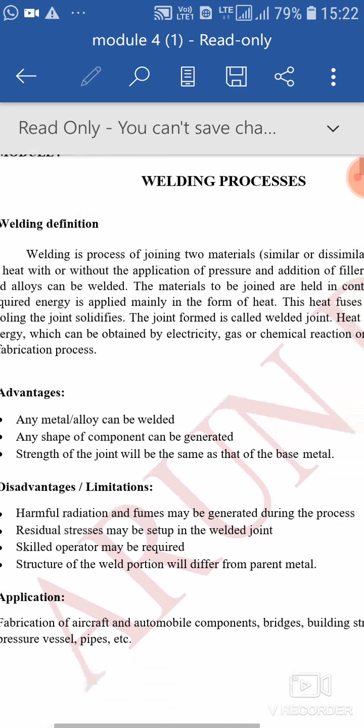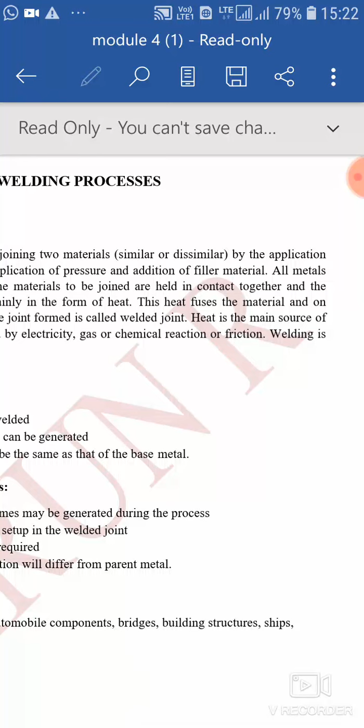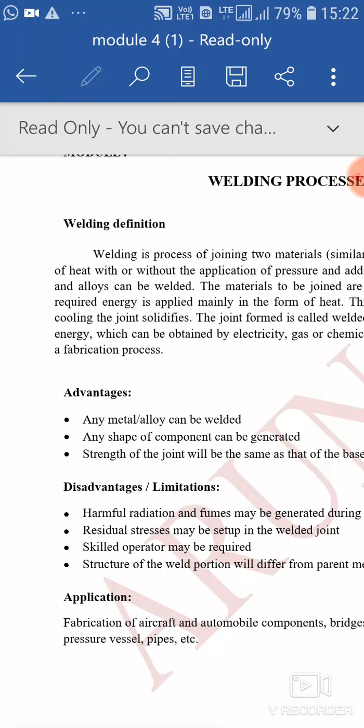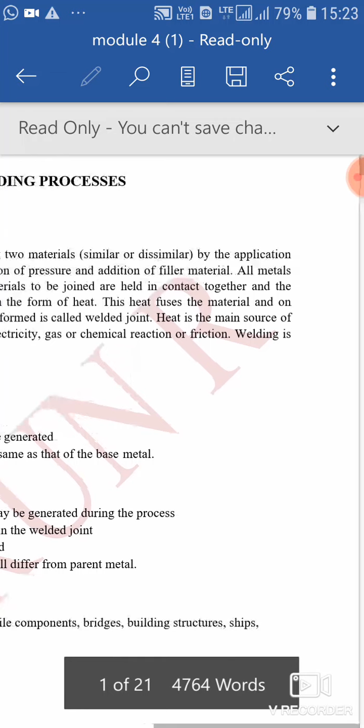The fourth module: welding process. Definition of welding: welding is a process of joining two materials, similar or dissimilar, by the application of heat, with or without the application of pressure, and with or without the addition of filler material. All metals and alloys can be welded. The materials to be joined are held in contact together, and the required energy is applied mainly in the form of heat. The heat fuses the material, and on cooling the joint solidifies. The joint formed is called welded joint. Heat is the main source of energy, which can be obtained by electricity, gas, chemical reaction, or friction.

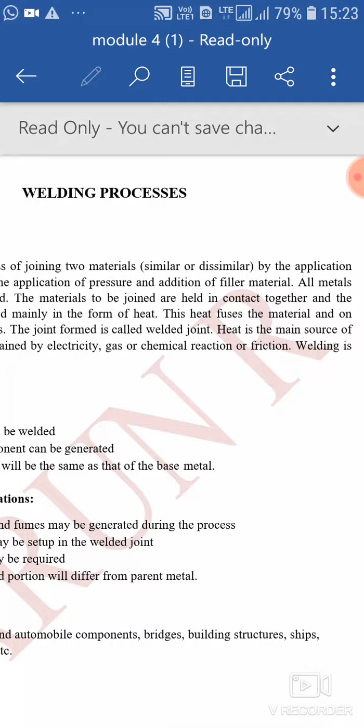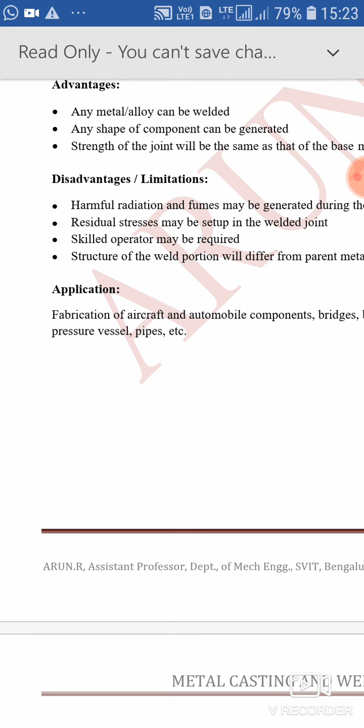Welding is a fabrication process. Advantages of welding: any metal or alloy can be welded or joined. Any shape of the component can be generated. Strength of the joint will be the same as that of the base metal.

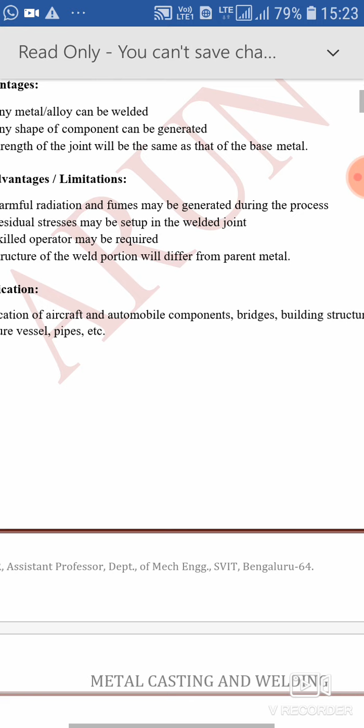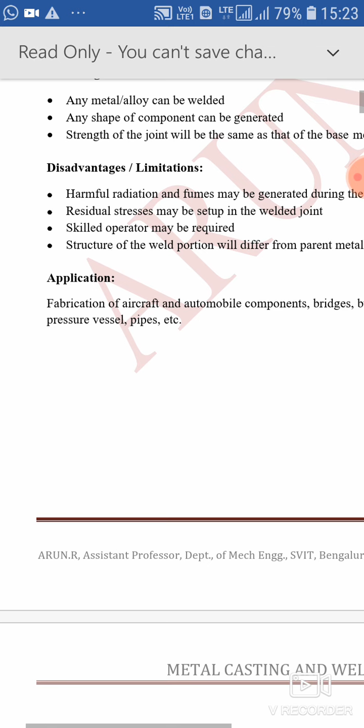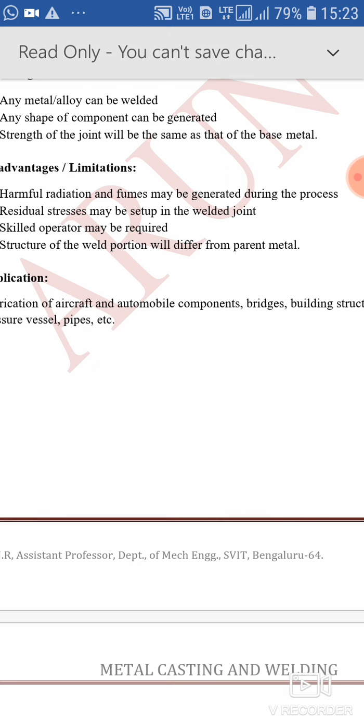Disadvantages and limitations: harmful radiation and fumes may be generated during the process. Residual stresses may be set up in the welded joint. A skilled operator may be required. The structure of the weld portion will differ from the parent metal.

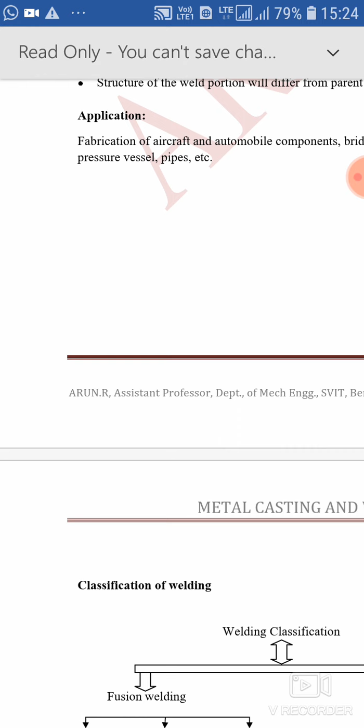Applications of welding: fabrication of aircraft and automobile components, bridges, building structures, ships, pressure vessels, pipes, etc., where welding can be used extensively.

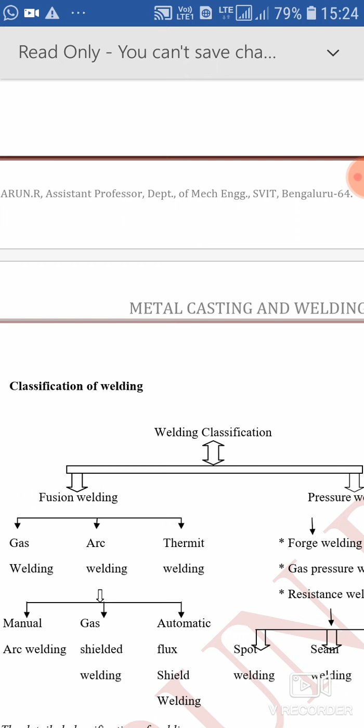Welding is broadly classified into two categories: one is fusion welding, or welding without pressure; the other is pressure welding.

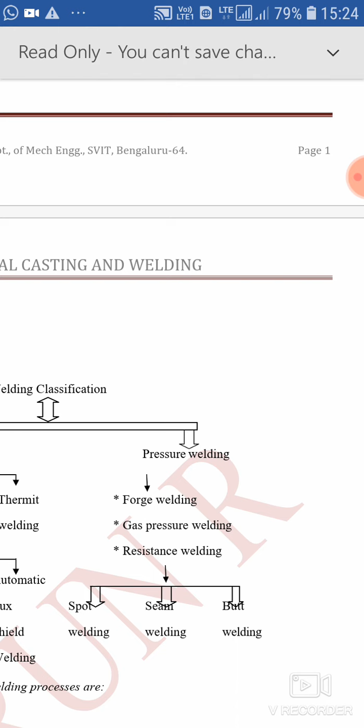In fusion welding: gas welding, arc welding, thermit welding, which are further classified into manual, gas, and automatic. In pressure welding: forge welding, gas pressure welding, resistance welding, spot welding, seam welding, butt welding process.

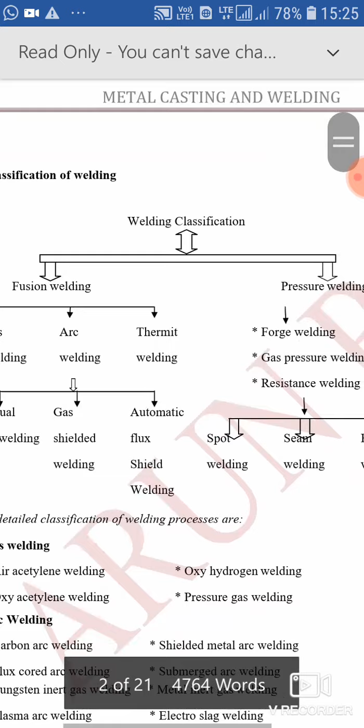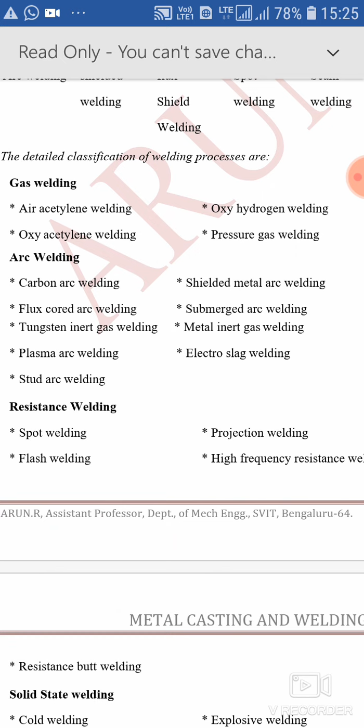Gas welding process: air acetylene welding, oxy-hydrogen welding, oxy-acetylene welding, pressure gas welding.

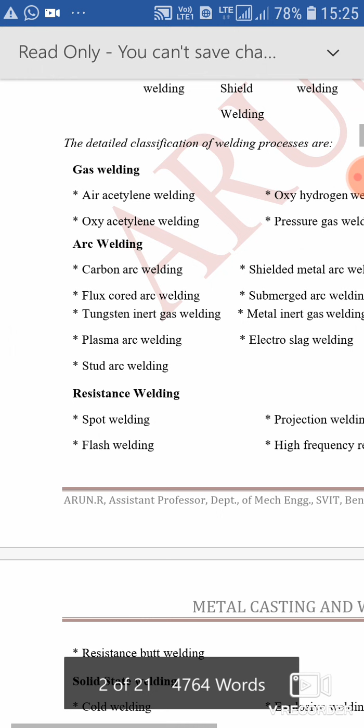Arc welding: carbon arc welding, shielded metal arc welding, flux cored arc welding, submerged arc welding, tungsten inert gas welding, metal inert gas welding, plasma arc welding, electro slag welding, stud arc welding.

Resistance welding: spot welding, flash welding, projection welding, high frequency resistance welding, resistance butt welding.

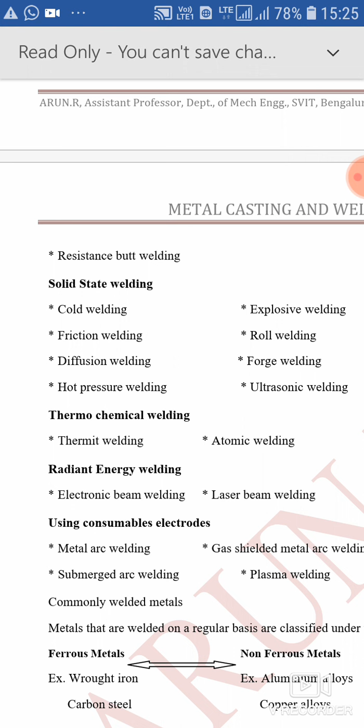Thermochemical welding: thermit welding, atomic welding, radiant energy welding, electron beam welding, laser beam welding, using consumable electrodes: metal arc welding, gas shielded metal arc welding, submerged arc welding.

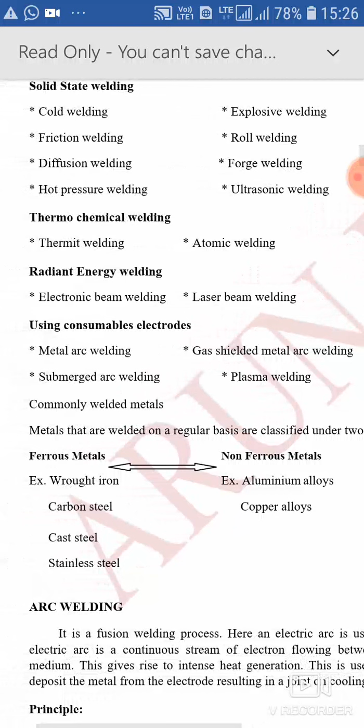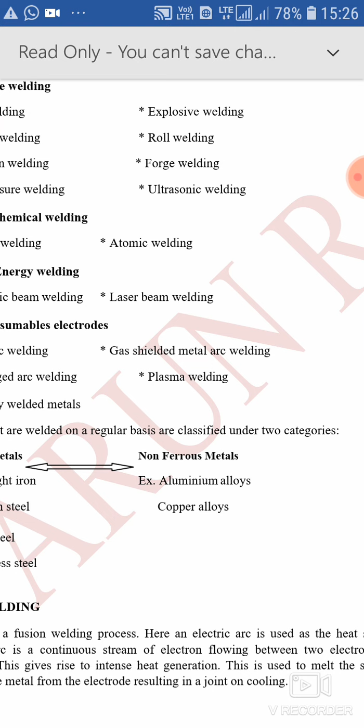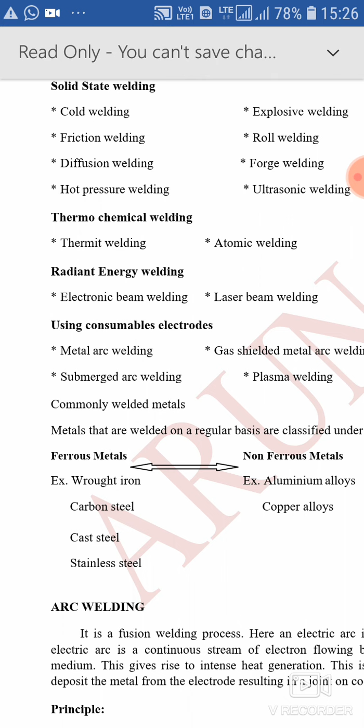Plasma welding. Commonly welded materials: the metals that are welded on a regular basis are classified under two categories: ferrous metals and non-ferrous metals. In the ferrous metal category, examples are wrought iron, carbon steel, cast steel, stainless steel. In non-ferrous metals: aluminum alloys, copper alloys, etc.

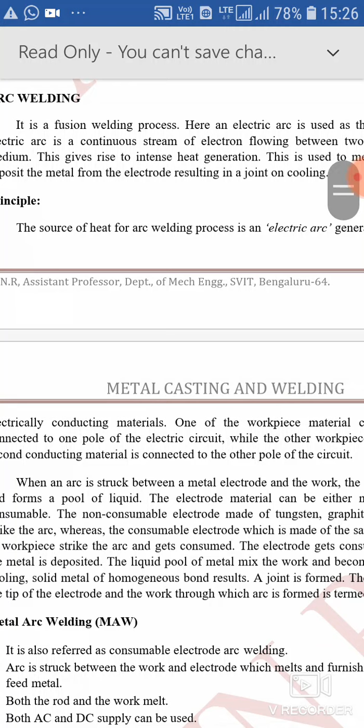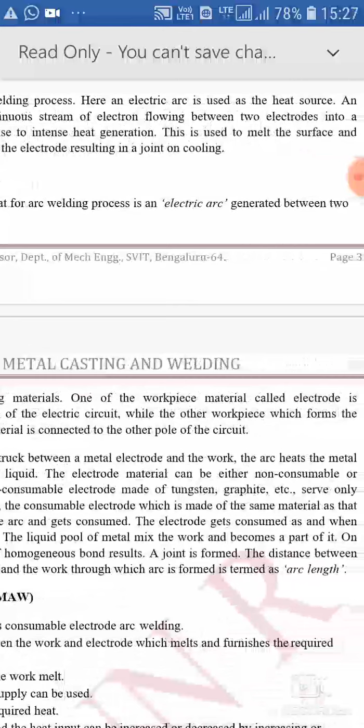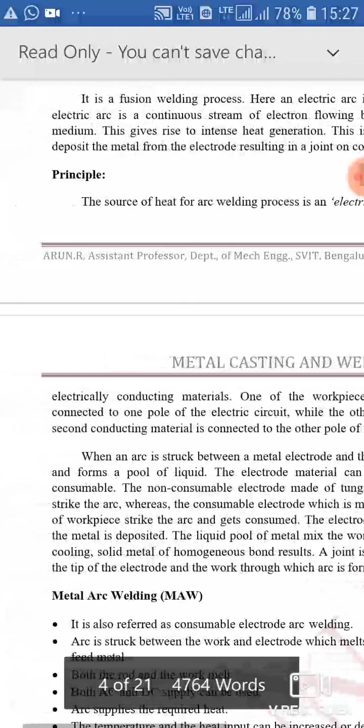Next, arc welding process. It is a fusion welding process. Here, an arc is used as the heat source. An electric arc is a continuous stream of electrons flowing between two electrodes into a medium. This gives rise to intense heat generation, which is used to melt the surface and deposit metal from the electrode, resulting in a joint on cooling.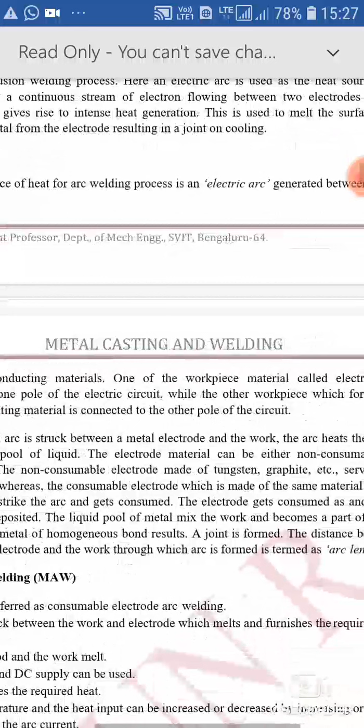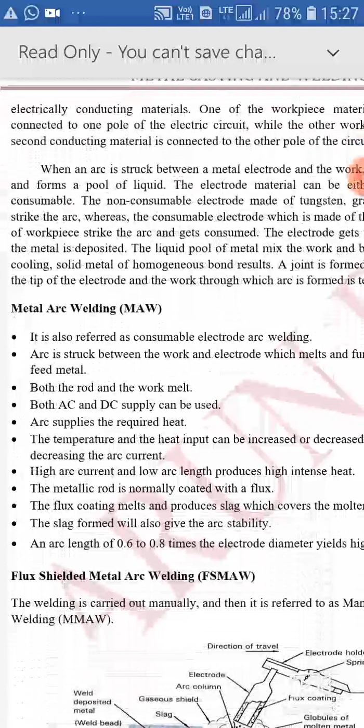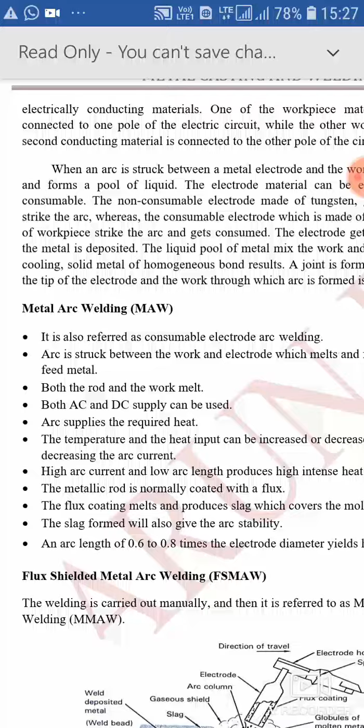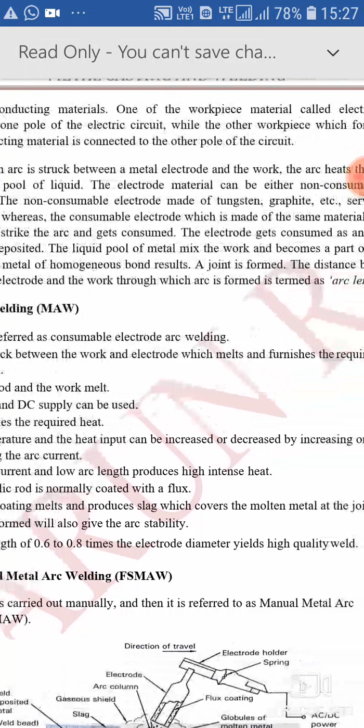Principle: the source of heat for the arc welding process is an electric arc generated between two electrically conductive materials. One of the workpiece materials, called the electrode, is connected to one pole of the electric circuit, while the other workpiece, which forms the second conducting material, is connected to the other pole of the circuit. When an arc is struck between a metal electrode and the work, the arc heats the metal and forms a pool of liquid molten metal.

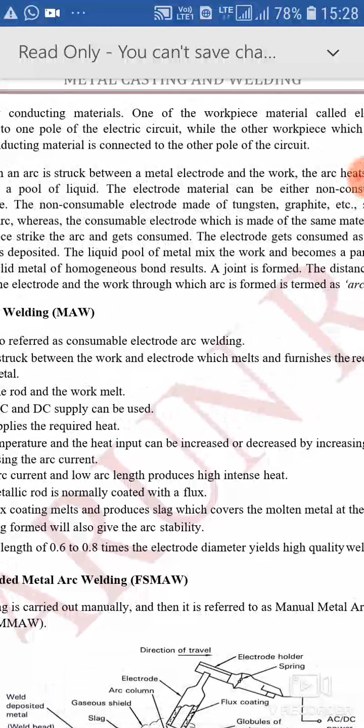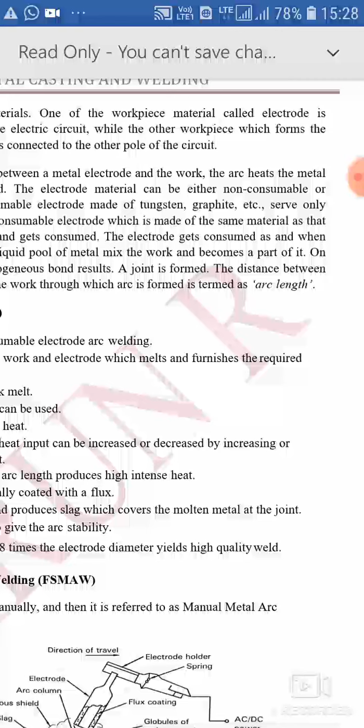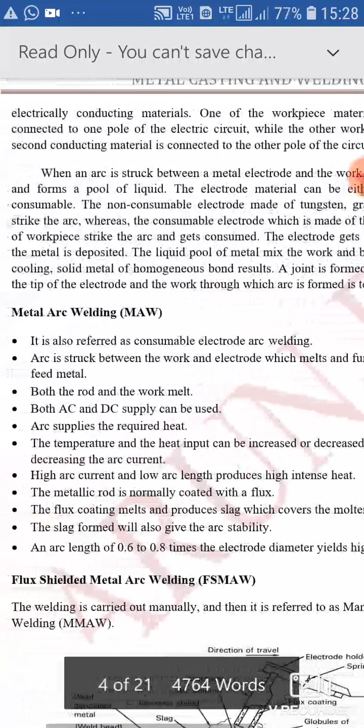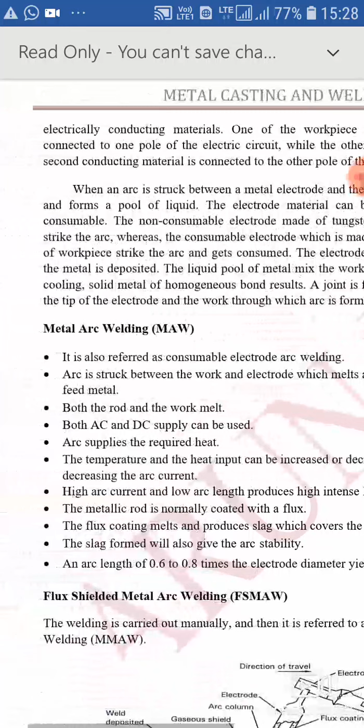The electrode material can be either non-consumable or consumable. The non-consumable electrode, made of tungsten, graphite, etc., serves only to strike the arc, whereas the consumable electrode, made of the same material as the base metal or workpiece, strikes the arc and gets consumed. The electrode gets consumed as the metal is deposited, acting as a filler metal.

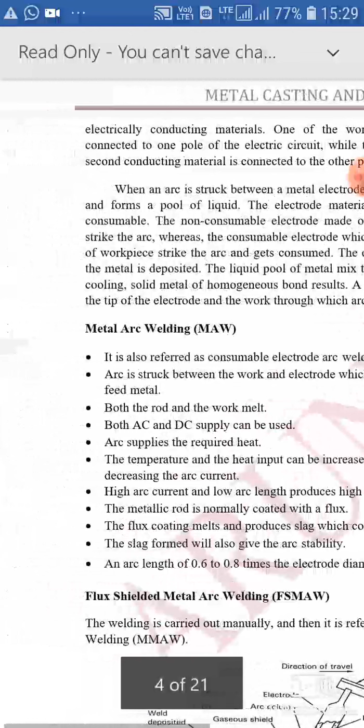The liquid pool of metal mixes with the work and becomes a part of it. On cooling, a solid metal of homogeneous bond results, and a joint is formed. The distance between the tip of the electrode and the work, through which the arc is formed, is termed as arc length.

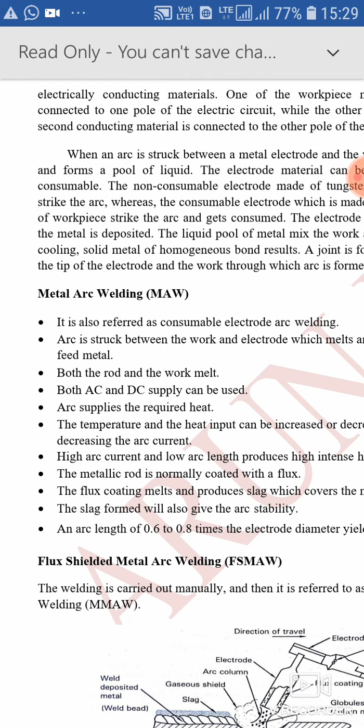Metal arc welding is also referred to as consumable electrode arc welding. An arc is struck between the work and electrode, which melts and furnishes the required feed metal. Both the rod and the work melt.

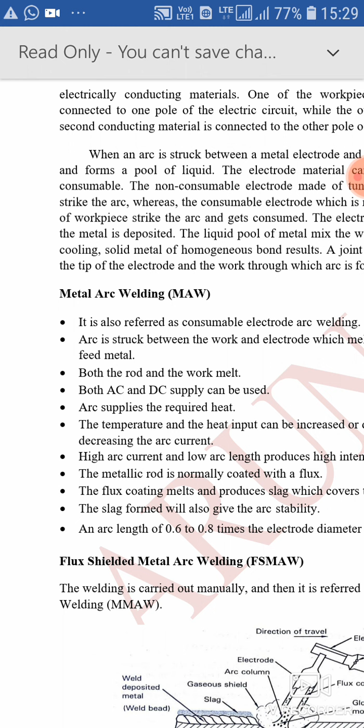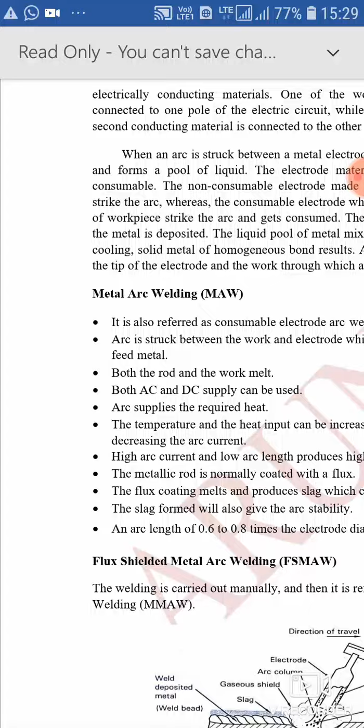Both AC and DC can be used here. The arc supplies the required heat. The temperature and the heat input can be increased or decreased by increasing or decreasing the arc current. High arc current and low arc length produce high intense heat.

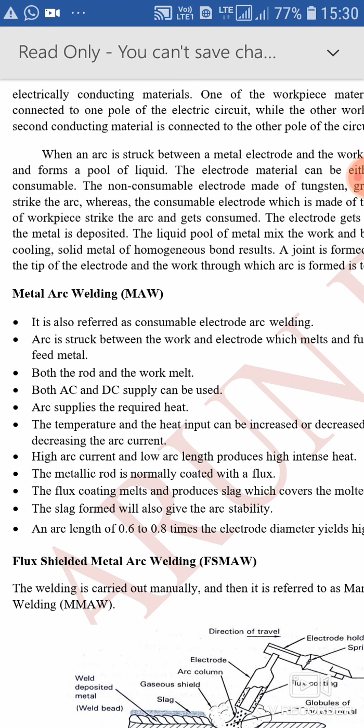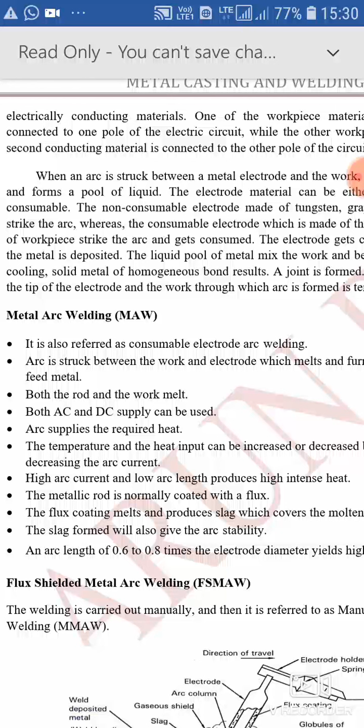The metallic rod is normally coated with a flux. The flux coating melts and produces slag, which covers the molten metal at the joint. The slag formed will also give the arc stability. An arc length of 0.6 to 0.8 times the electrode diameter yields a high quality weld.

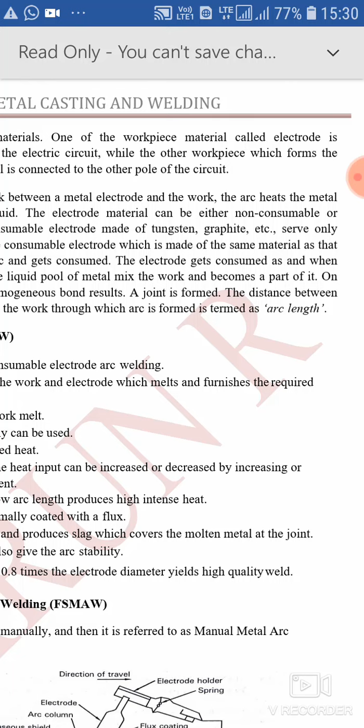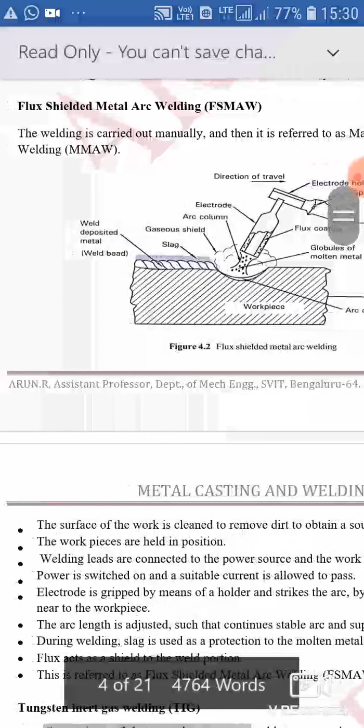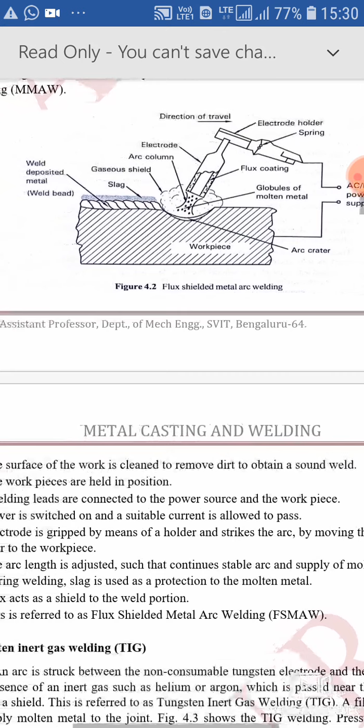Next, flux shielded metal arc welding. The welding is carried out manually, and then it is referred to as manual metal arc welding. The surface of the workpiece is cleaned to remove dirt to obtain a sound weld.

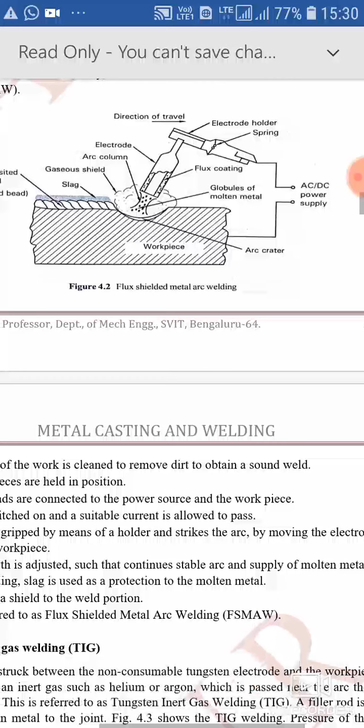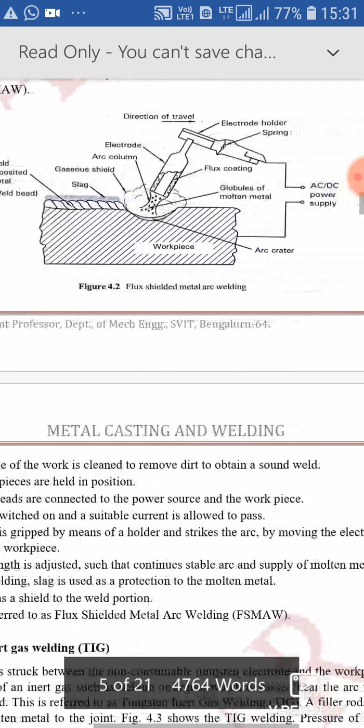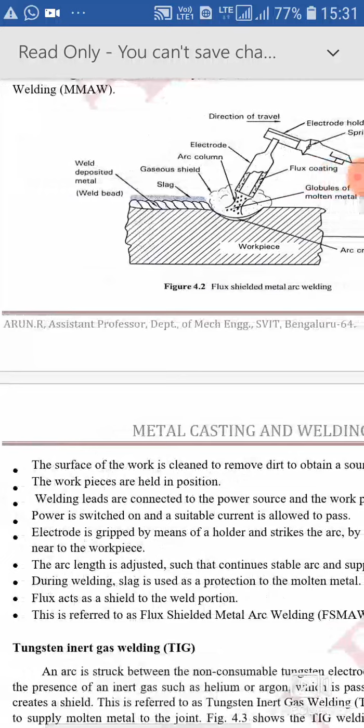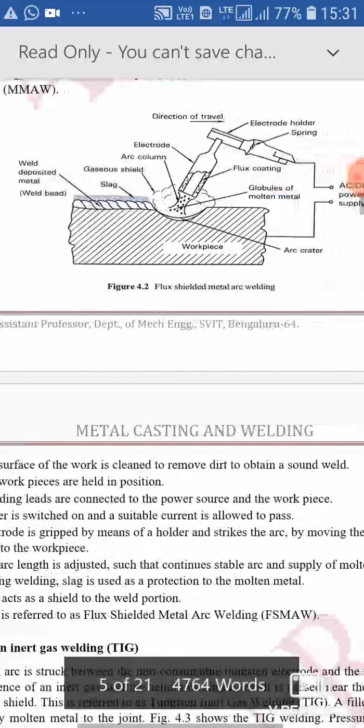The workpiece is held in position. Welding leads are connected to the power source and the workpiece. Power is switched on and a suitable current is allowed to pass. The electrode is gripped by means of a holder, and the arc is struck by moving the electrode near the workpiece. The arc length is adjusted such that there is a continuous stable arc and supply of molten metal.

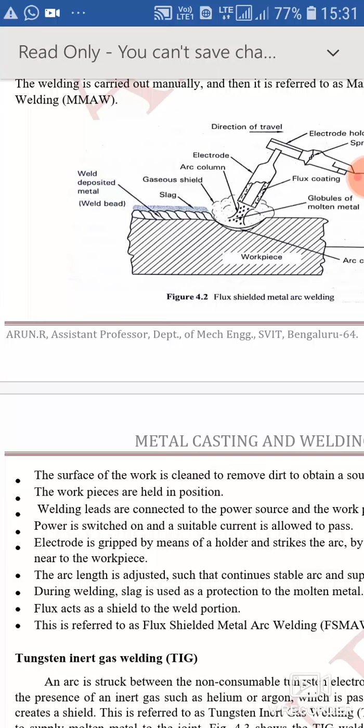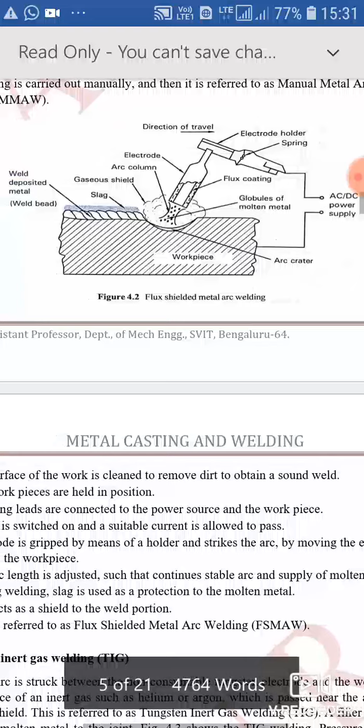During welding, slag is used as a protection to the molten metal. The flux acts as a shield to the weld portion. This is referred to as flux shielded metal arc welding.

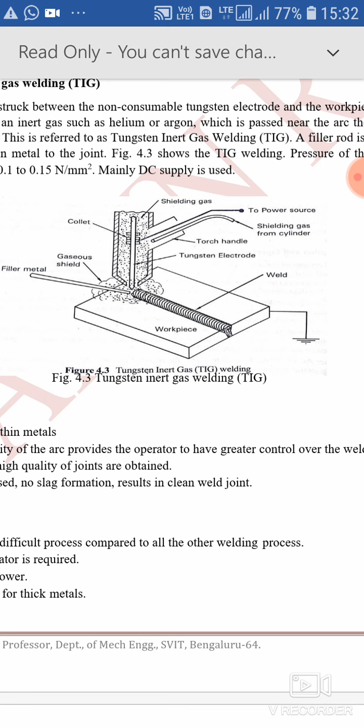Next, tungsten inert gas welding. An arc is struck between a non-consumable tungsten electrode and the workpiece. The presence of an inert gas, such as helium or argon, is passed near the arc, thereby creating a shield. This is referred to as tungsten inert gas welding.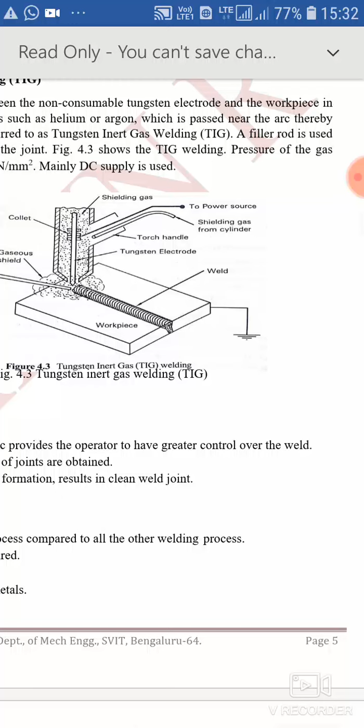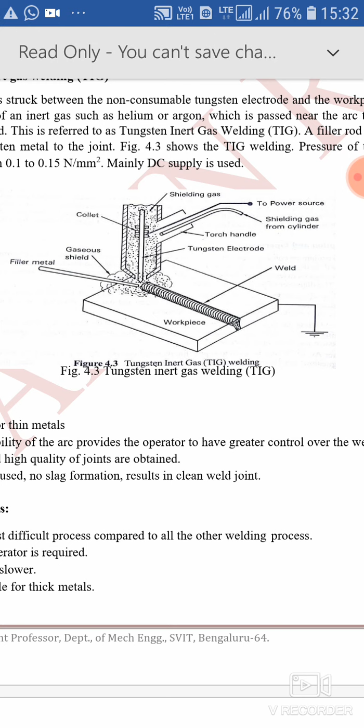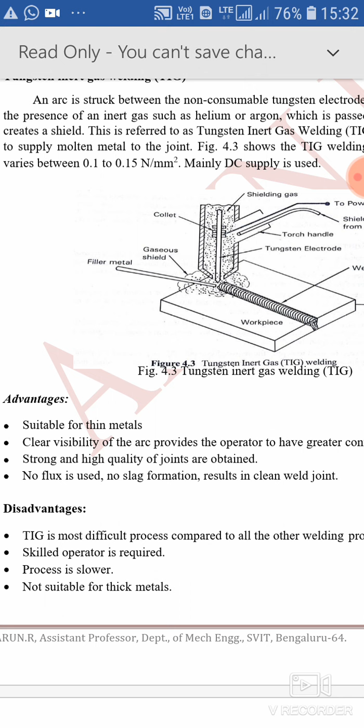A filler rod is used to supply molten metal to the joint. The figure below shows the arrangement for tungsten inert gas welding, showing the TIG welding setup. The pressure of the gas varies from 0.1 to 0.15 newtons per mm square. Mainly DC supply is used.

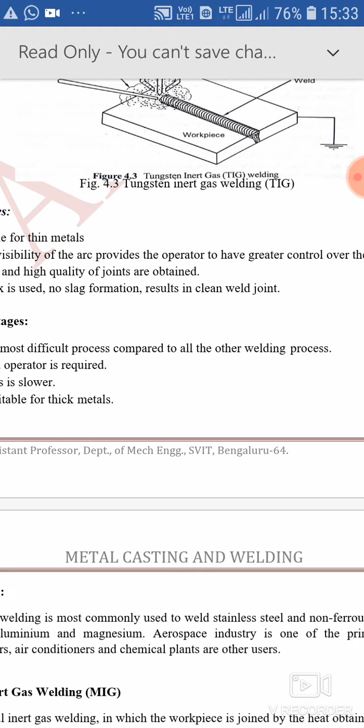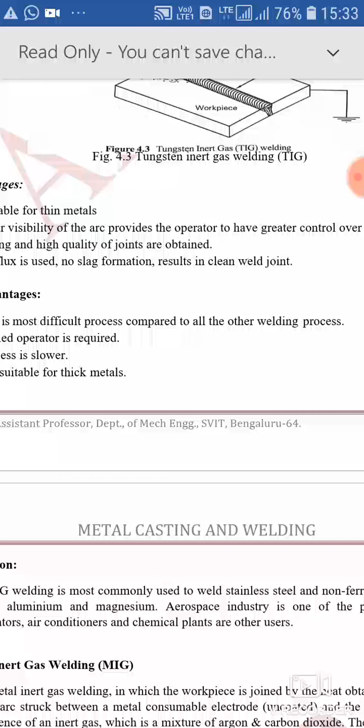Advantages of tungsten inert gas welding: suitable for thin metals. Clear visibility of the arc provides the operator greater control over the weld. Strong and high quality joints are obtained. No flux is used, and no slag formation results in a clean weld joint.

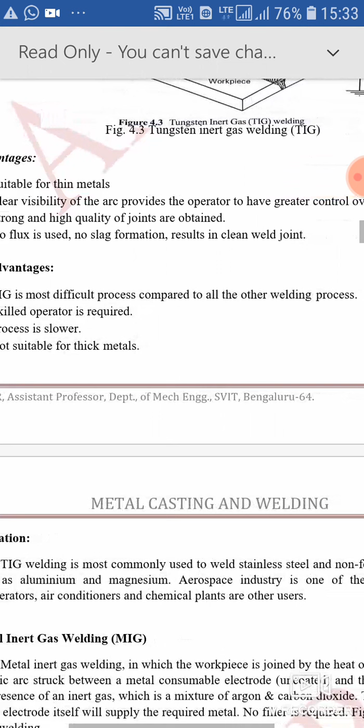Disadvantages: TIG, that is tungsten inert gas welding, is the most difficult process compared to all other welding processes. A skilled operator is required. The process is slower and not suitable for thick metals.

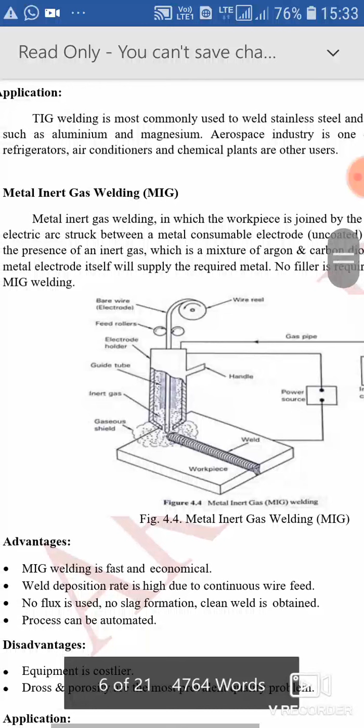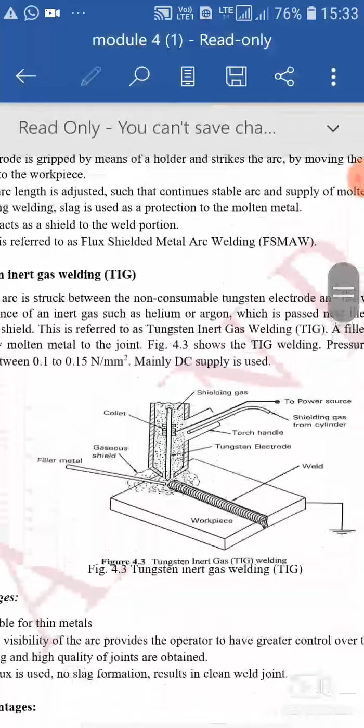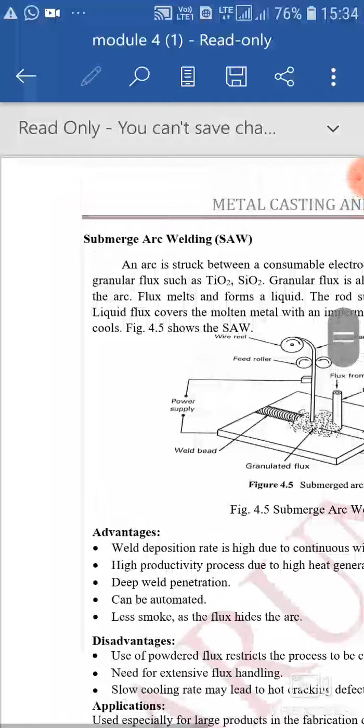Applications where tungsten inert gas welding is used: TIG welding is commonly used to weld stainless steel and non-ferrous metals such as aluminum and magnesium. The aerospace industry is one of the primary users. Refrigerators, air conditioning, and chemical plants are the others.